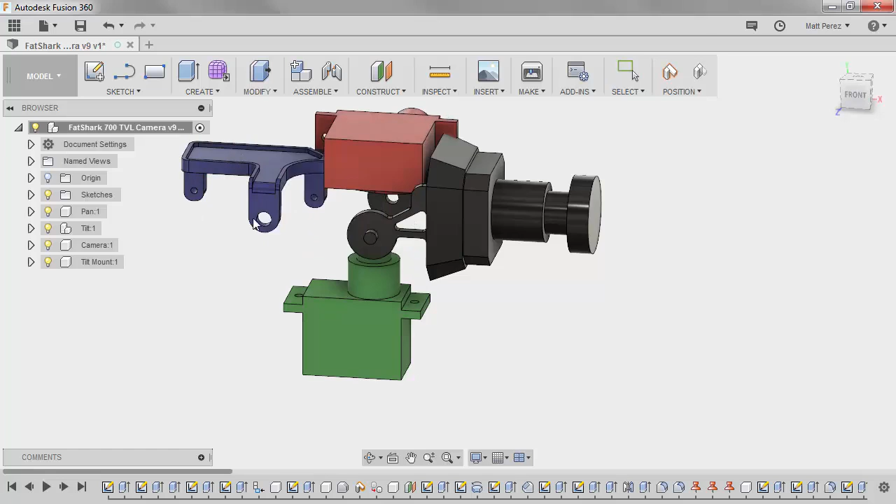Now a portion of the tilt servo is actually held with part of the bracket that holds both of these together. So we have to create our own version of that integrated into the 3D print. More on that in another lesson, but for right now we want to focus on how we can get motion between components. Right now everything is free to move about in this assembly environment.

We're going to revert back to this position, and we want to talk about how we can create both as-built and manually built joints. To get started, let's hide the tilt mount and let's hide the camera, just showing the tilt servo and the pan servo.

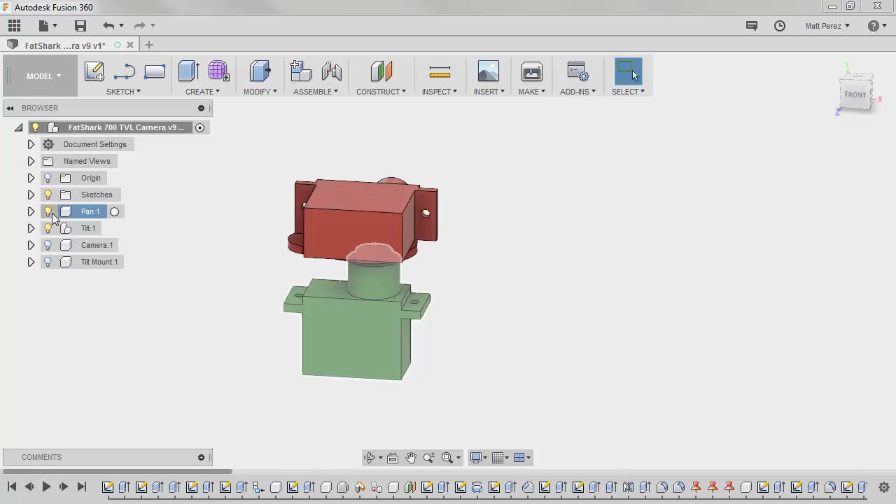The first thing that I want to do is I want to fix the pan servo in 3D because right now it's free to move around. So we're going to right click on it and we're going to select ground. Now if we grab it and try to move it, it's no longer able to move.

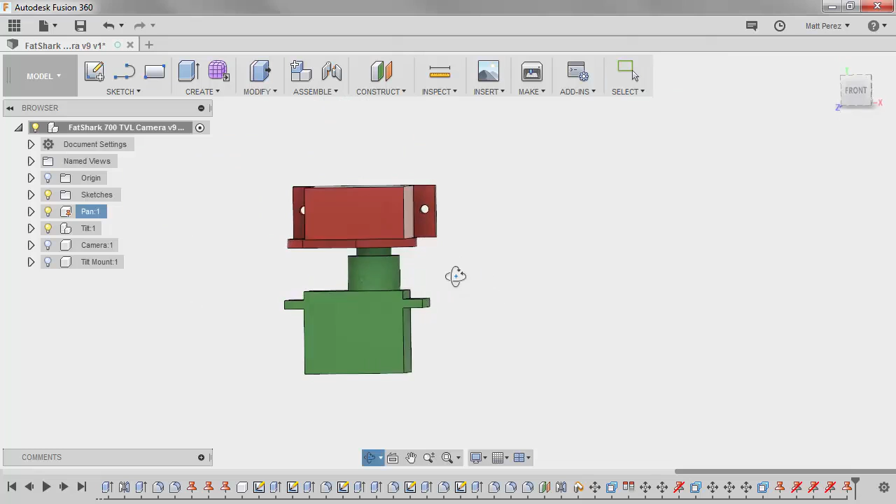If we grab this one here, you can see it's still free to move, and we're going to go ahead and revert its position. As we rotate it around and we expand the tilt servo, notice that we have tilt servo with two bodies in it. There's a cable guide body and there's a tilt servo.

The cable guide body is actually the portion of the injection molded plastic that holds the two together and allows the cable coming from the camera to wrap around and go back out so that it doesn't get bound up when things tilt or pan.

We don't really need it in this file, but the only reason I left it in there is so that we could see that there's no round section between these two servos where we can actually go back in and make a joint location. So this is important because the as-built joint is going to allow us to make use of their current location without having to worry about specifics like that.

When we talk about assembly motion, we need to make sure that we understand that components can have joints, but bodies cannot. Now currently we have a pan component, a tilt component, a camera, and a tilt mount. Each of these are components and they can be activated and worked on individually, and this means that we can apply joints between them.

If we simply just have a body at the top level, that is going to always be fixed in the environment, with the exception of using modify, move, copy. It cannot have assembly motion associated with it.

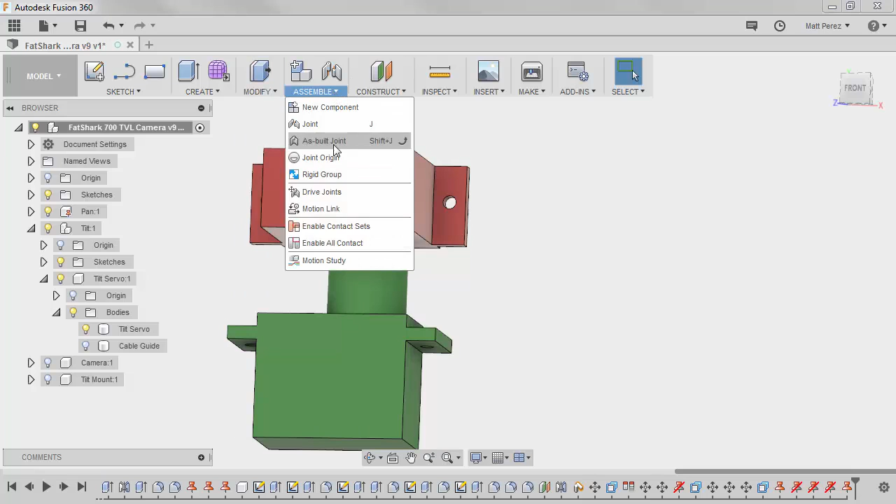Let's go to our assemble dropdown and select as-built joint. We're going to select our components, and by default it's set to rigid, but we're going to use revolute, and then we need to select the position.

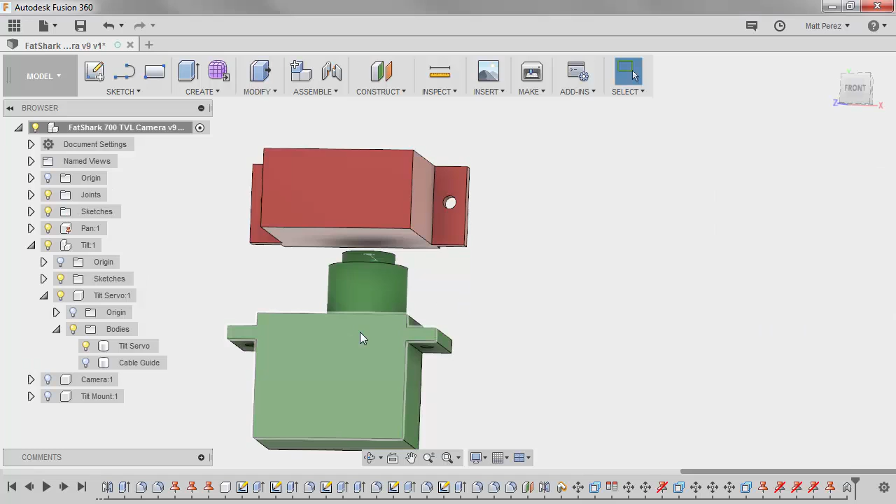Now we're not looking for a position that will define their location in relation to each other, but really we're looking for the pivot location. So we'll select this, and the preview on the screen takes the selection of the green servo and rotates it, but that's okay because this one is ground and now the red one can move around.

So this is great because we don't have a location on that servo that can actually dictate where that motion is supposed to be, but the as-built joint already took care of it for us. We're going to revert the position, and now we want to show another component.

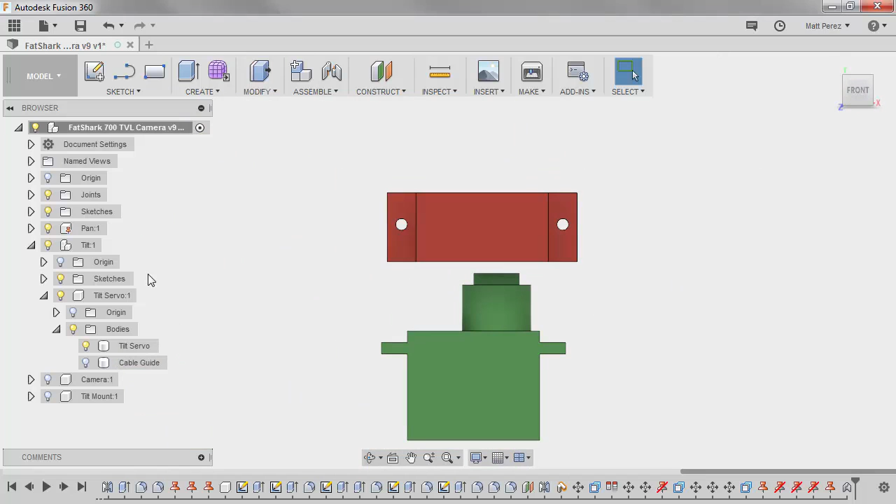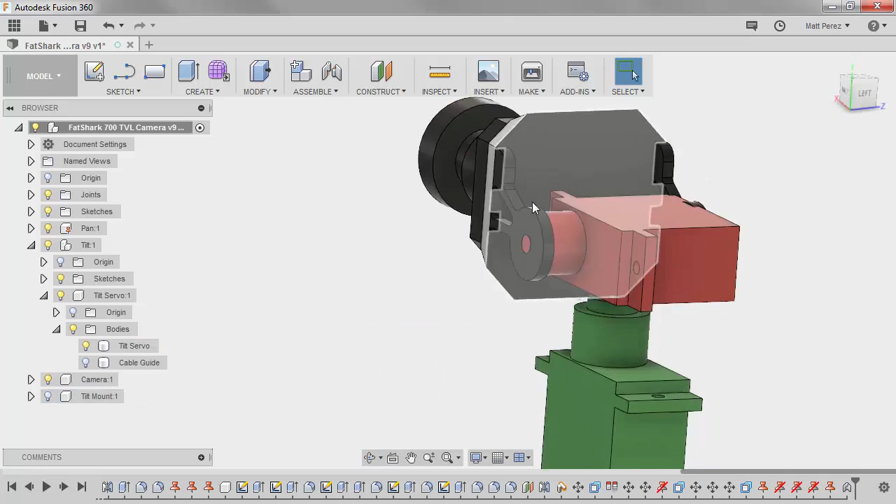If we bring in the camera and we bring in the tilt mount, we want to take a look at two things. The tilt mount is going to bolt to the servo, and the camera is going to be partially aligned to the servo and partially aligned to the tilt mount. So in this case, we can actually omit the tilt mount, and we can just take a look at applying a relation or a joint between the camera and this portion of the servo.

Now they're not currently next to each other. If I revert, you can see that it looks like it's in line with it, but we're going to move it away and we're going to capture its position there so that we can take a good look at how we can apply joints if things are not designed inside of Fusion.

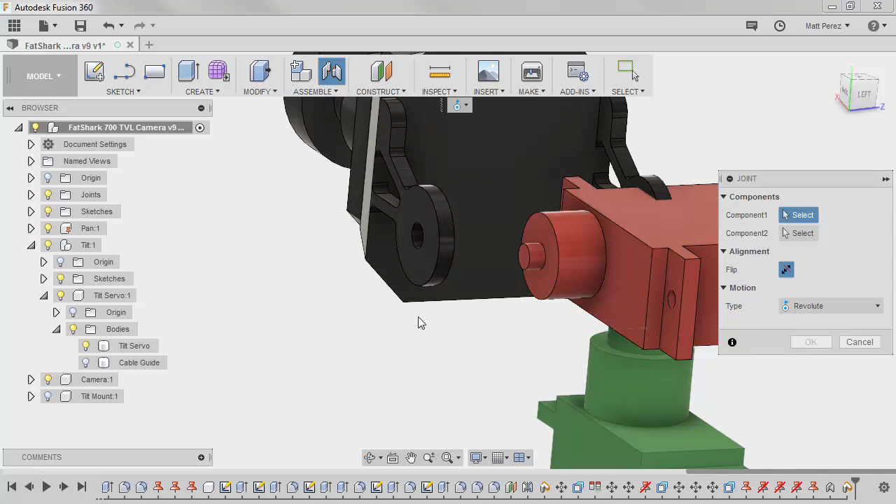From the Assemble dropdown, we'll select Joint. The big difference here is when we select components, we need to be aware of the location we're selecting as well. When you use an as-built joint, you only need to focus on selecting the components, then go back and pick the position. In this case, we need to select the component's position at the same time.

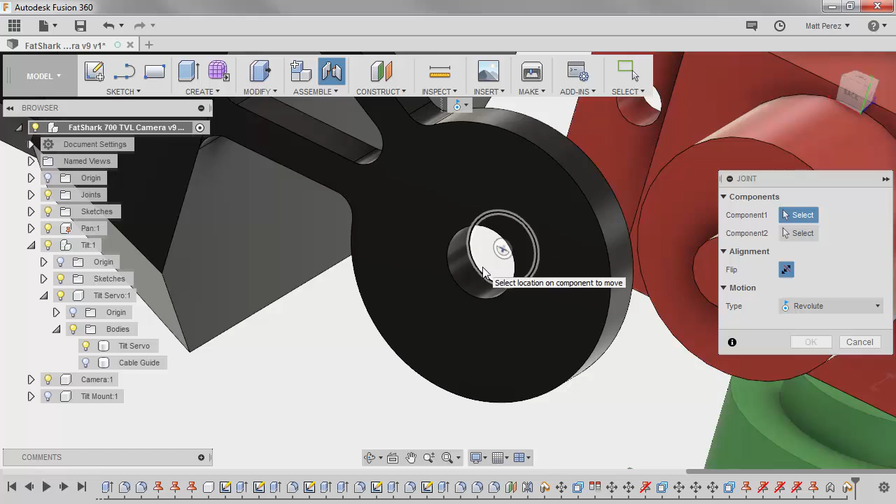If you have a face selected, you can hold down the Control key and navigate to all the selectable points. If you have the inside bore of a cylinder like this, you can hold down Control and navigate to the midpoint or any of the endpoints associated with it. In our case, what we want is the center point of this outside edge, or if we rotate it around, this inside edge.

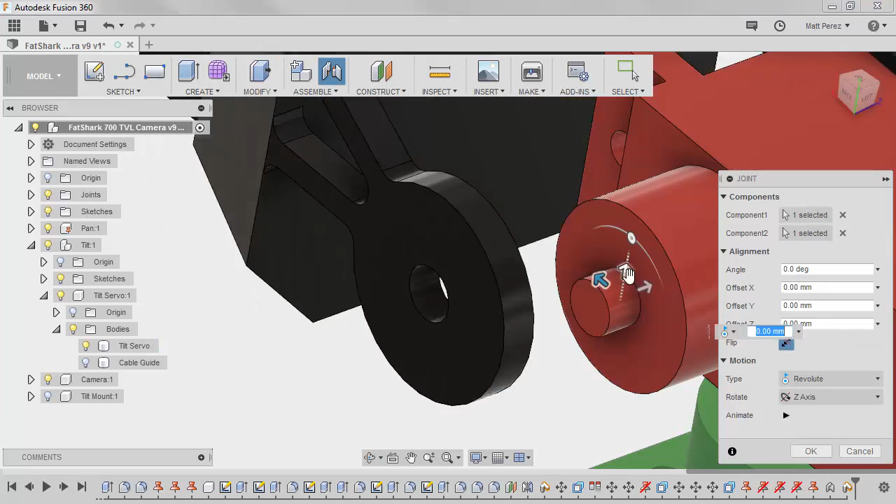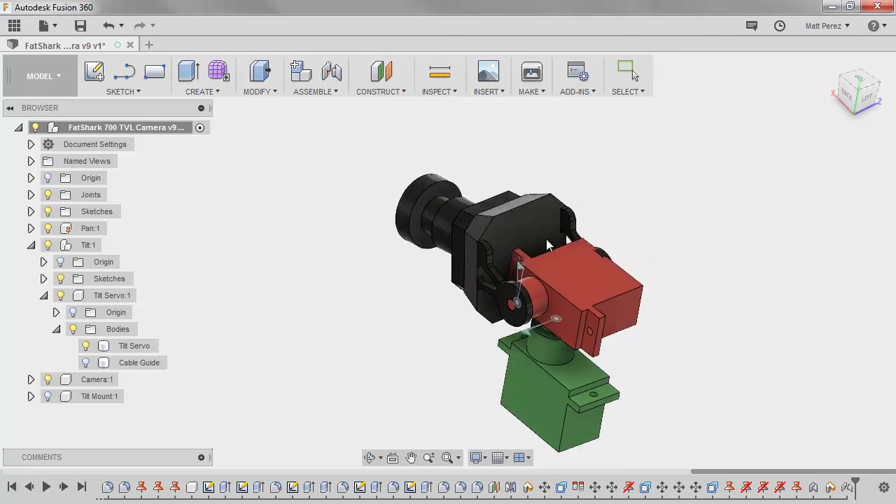So this is going to be the first component as well as the first joint location. What Fusion wants to see is a secondary joint location where it can completely match this up. We're going to select this location and it'll bring them together, giving us a preview of the rotation direction. It's got the Z-axis as its rotation axis, and this is going to work out for us in this case. But notice we also have on-screen manipulators where we can change that. We'll say OK. Now we have a camera that can tilt up and down, and the green servo, which can rotate left and right—so we have the 2 degrees of freedom that the camera originally came with.

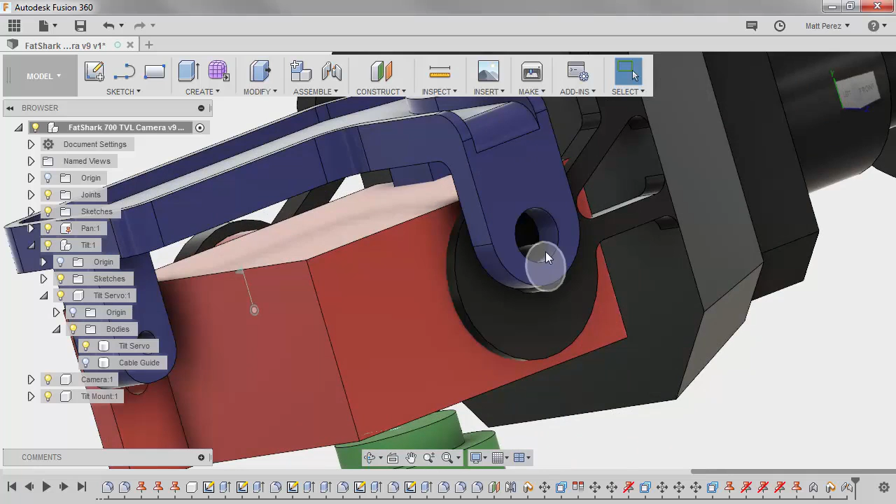Let's go ahead and show the tilt mount. In reality, the tilt mount is a critical component because its pivot is holding the other side of the camera. There are a few things we can do here.

This is actually going to be a fixed or stationary component in relation to the servo, but we might want to make sure that the pivot points line up. So we're going to start by going to Assemble and Joint, again following that same selection process. We're going to move these together, allow them to rotate using the revolute type, and say OK.

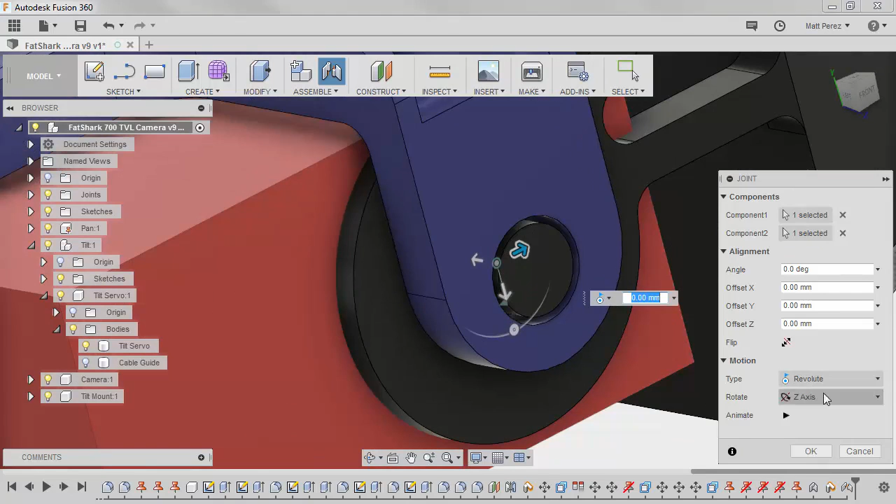Once they're together, you can see that the whole location of the servo is pretty close. It's not perfect, but it's close enough for us to say that it's possible the resolution of the file is off.

So we're going to go ahead and use it, and what we're going to do is create a rigid group between 2 components. Under Assemble, we have the Rigid Group option, and also if you go into Joint, there is a Rigid type. These differ in one specific way: if we go to Assemble and Rigid Group, we can select more than 2 components, but if you create a joint that's rigid, it'll only be between 2 components.

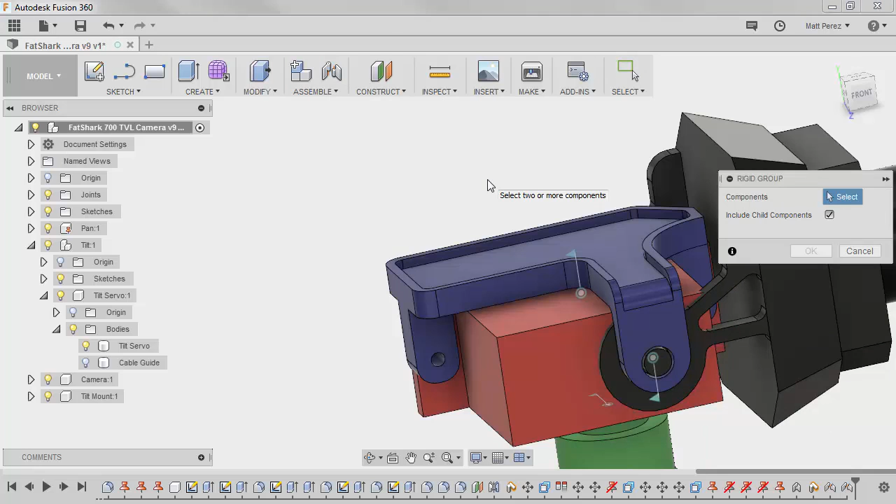In our case, we're going to select both of these and make them rigid to each other, so they move around with each other. The camera can still pivot up and down because it has the 2 joints and those axes are in line. We can revert back to that position at any point in time.

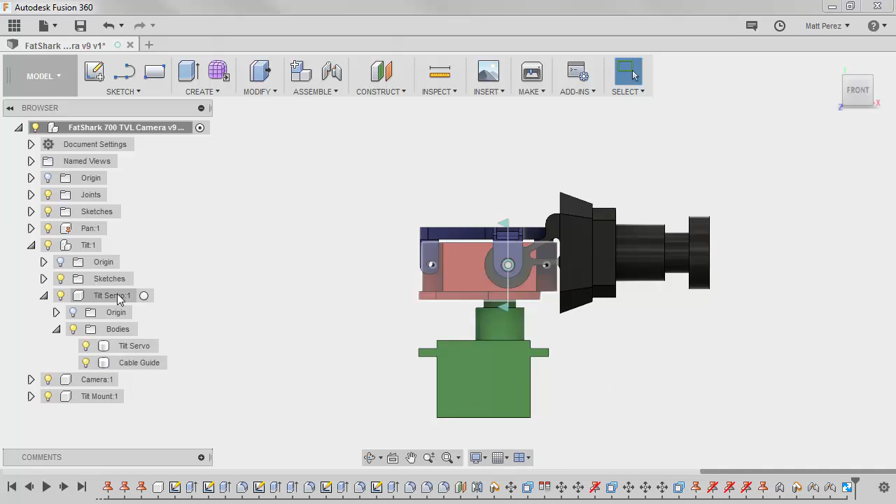We can turn on the cable guide, and because it's a body inside of this tilt servo component, it's going to move with it as well—following all of that geometry.

Because bodies cannot have individual joints applied to them, joints are applied to the component at the top level. You can see this by looking at the components and where the joints are located. The tilt component has a subcomponent called tilt servo, and this tilt servo component will have joints applied to it. The origin, sketches, and joints folders are located at the top level of our document, and if we expand each of these components, they'll have their individual bodies and origins associated with them.

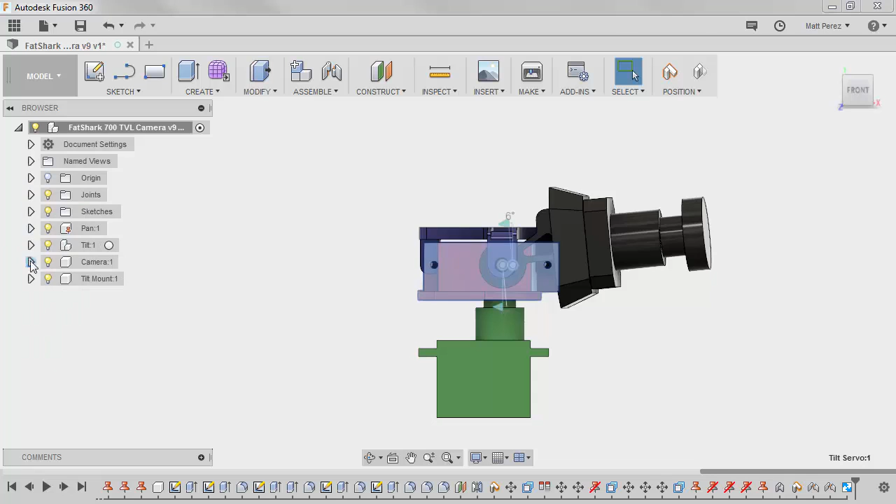If we expand this, you can see that we have Revolute 3, Revolute 4, Revolute 5, and Rigid Group 6.

One thing that's handy is you can also see the angle on the screen. If we revert the position and rotate this, we can see just how much each of these joints is being moved, and this helps us later on when we try to determine what our joint limits are going to be.

For right now, let's revert the position, save the file, and we can move on to the next step.